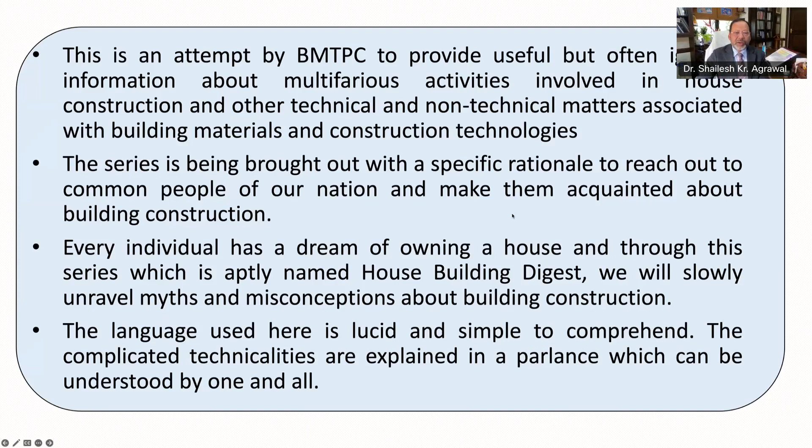Let's discuss plastering. Plastering is an element which gives an appreciative appearance to your house, protects it from vagaries of nature, dampness, etc. Accordingly, the home owner should acquaint himself with the process of plastering and carry it out with utmost care. It involves covering of rough surfaces of superstructure walls or underside of ceilings so as to obtain an even, smooth and durable surface.

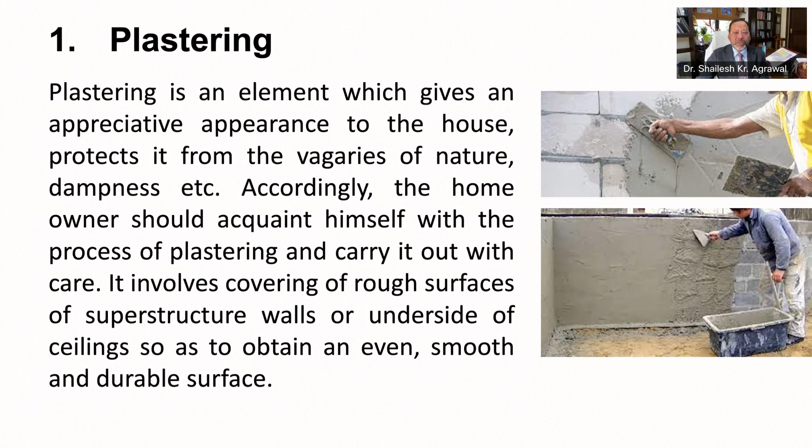Plastering protects the wall against wind, rain, abrasion, and improves the thermal performance and appearance. Plasters should be easy to apply without the use of expensive and elaborate tools. All types of plasters, especially those on external surfaces, need to offer erosion resistance, impermeability to moisture, impact resistance, and should be well bonded to the wall.

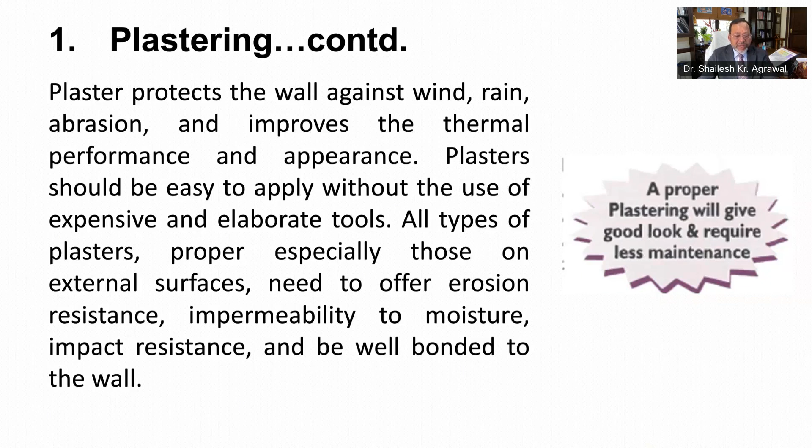Plaster has important requirements in the fresh and hardened states. In the fresh state, plaster must be workable and cohesive. In the hardened state, plaster must be strong enough to hold paint and withstand local impact and abrasion, free of unsightly cracking, well bonded to the base on which it is being applied, should have an acceptable surface texture, and should have acceptable surface accuracy with reference to plane or curved surface.

There are a number of ways in which plastering can be done in a house. The choice of the type of plastering to be provided is dependent upon the architectural features of the house, local availability of the material, and also the budget of the owner.

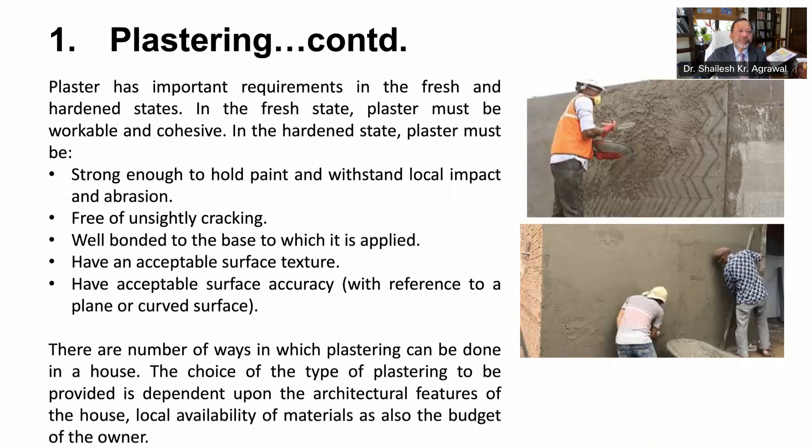Thickness of plaster applied is dependent upon the side of the wall being plastered. The plaster thickness on the rough side of the wall is kept more than that on the smoother side of the wall. When a mason raises a 9-inch thick or 23 centimeter wall or one brick wall, then the side of the wall on which he works gets a smoother surface, and hence it is called smoother side. Since his hand cannot reach the other side of the wall, a rough surface is obtained, and that side is designated as rough side.

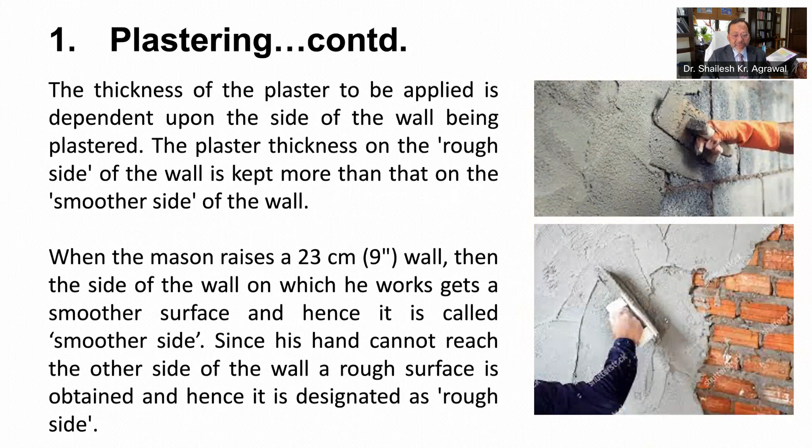Pointing is yet another way of providing protection to the wall, and the process involves application of mortar on the joints of the bricks or stone or block work. There are a number of ways in which pointing can be done on the walls. Usually, pointing works out to be more economical than plastering, and accordingly, it is adopted as a cost-saving measure. In case of pointing, the bricks or blocks remain exposed to the rain, etc., and accordingly, the performance of the walls is not as good as that of a plastered surface.

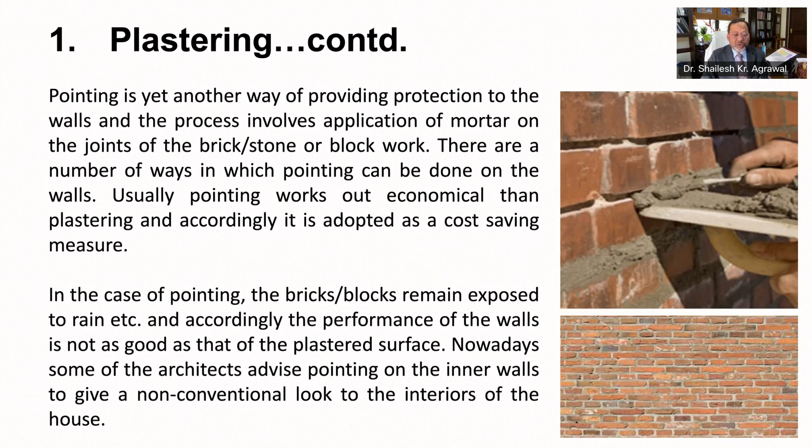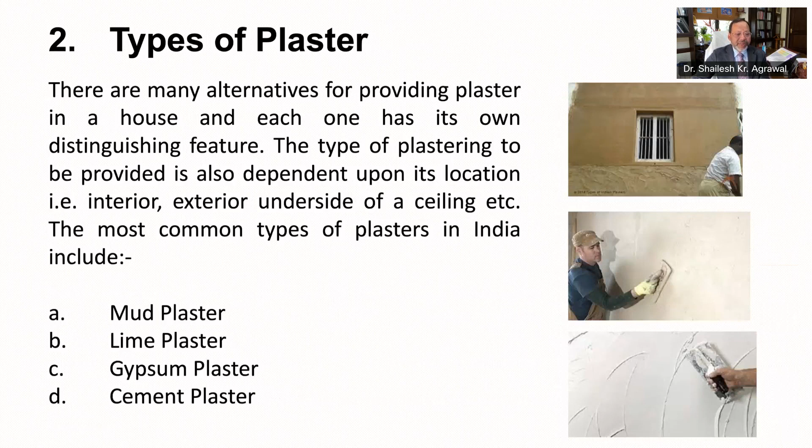Nowadays, some of the architects advise pointing of inner walls too to give a non-conventional look to the interior of the house. There are many alternatives for providing plaster in a house, and each one has its own distinguishing features. The type of plastering to be provided is also dependent upon its location, whether it is exterior or interior or underside of a ceiling. The most common types of plasters in India include mud plaster, lime plaster, gypsum plaster, and cement plaster. Let's discuss them one by one.

Mud plaster. Provision of mud plaster is an age-old method for protecting the walls, and the practice is found in almost all parts of the world. Mud plasters can practically be used for any surface, including mud or burnt bricks, stones, etc. Plasters out of mud are usually adopted in village houses as they are made out of local material, employing local masons and local artisans, and have also proved to be economical. Thermally, mud plasters are more comfortable than other types of plasters.

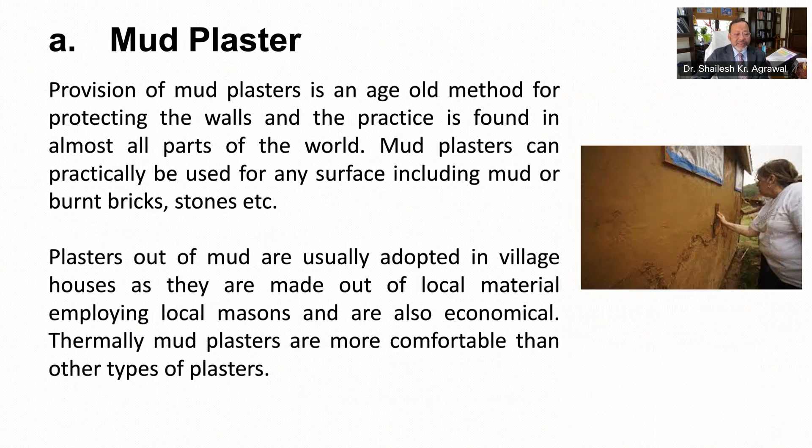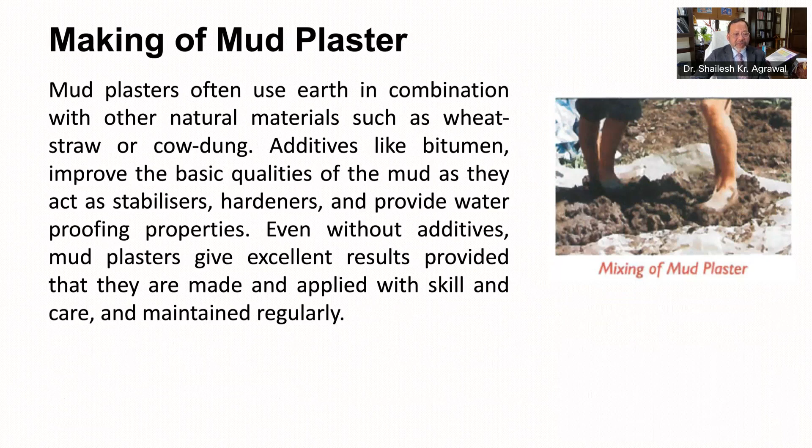Let's understand how to make mud plaster. Mud plasters often use earth in combination with other natural materials such as wheat straw or cow dung or bhusa. Additives like bitumen improve the basic qualities of the mud as they act as stabilizers, hardeners, and provide waterproofing properties. Even without additives, mud plasters give excellent results provided that they are made and applied with skill and great care and maintained regularly. Let me just tell you the composition of mud plaster.

It varies from place to place and is an important factor in determining its durability. If the clay content is too low, the plaster will lack strength and cohesion, and if it is too high, there will be risk of cracking due to mud plaster shrinkage. A suitable clay content is usually around 10 to 15%, but values outside this range could also be suitable depending upon the type of clay you are using. The sand to silt ratio is also very important in determining the quality of plaster. The amount of fibers required will also vary depending upon the soil characteristics, and requirements can vary from place to place.

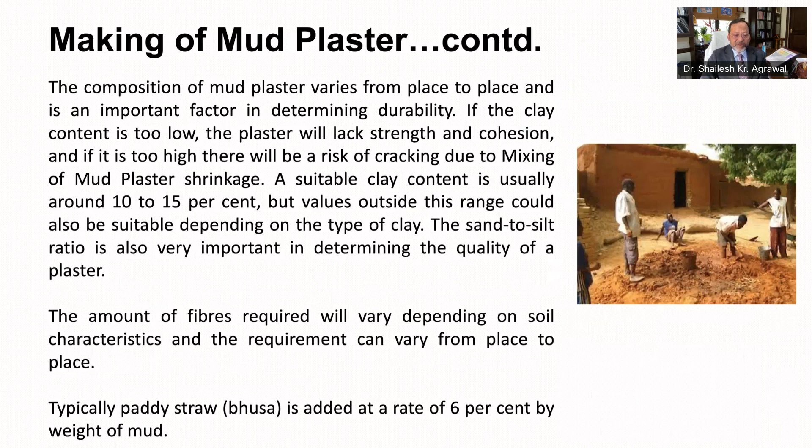Typically, paddy straw, which is also known as bhusa, is added at a rate of 6% by weight of mud. Mud plaster can be applied in two coats. The first coat may be thicker, containing more clay, while the second coat, which may be thinner, may contain more sand. The second coat is usually applied in a thinner layer.

The second coat helps to close the micro cracks in the first layer, provided the surface has been lightly dampened before plastering. Finally, whitewash can be applied to give some additional weatherproofing. If a cement or lime stabilizer is mixed in the mud, the plaster surface should be sprayed with water at least 2 or 3 times a day during the initial period to reduce the development of cracks.

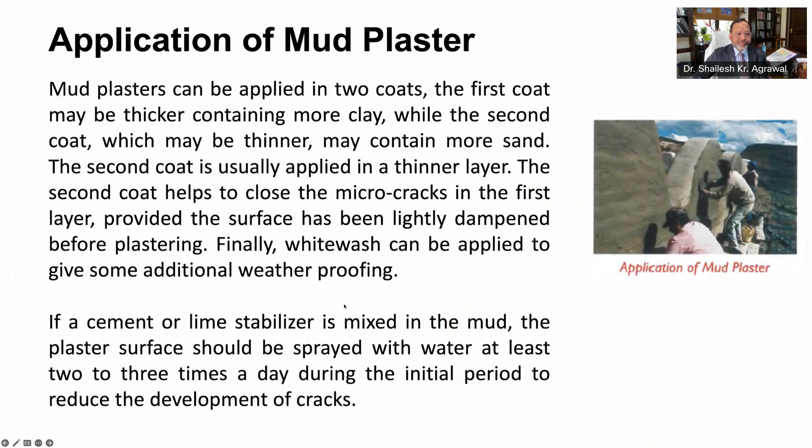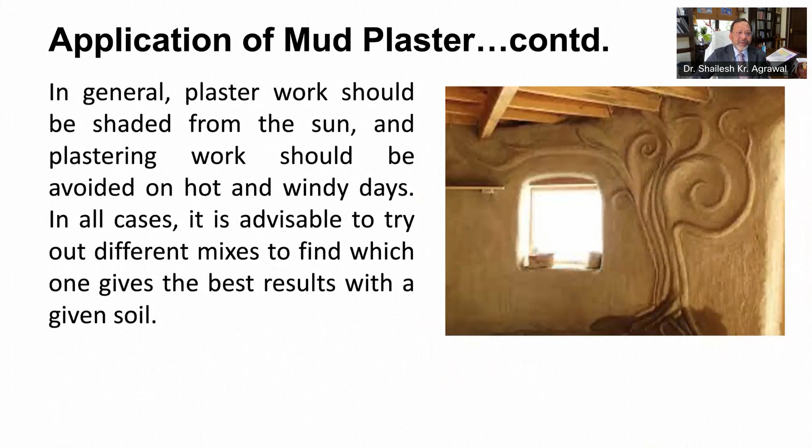In general, plaster work should be shaded from the sun, and plastering work should be avoided on hot and windy days. In all cases, it is advisable to try out different mixes to find which one gives the best results with a given soil. There is another type of mud plaster which is known as wattle and daub walls.

Daub is yet another form of wall finish which is made from mud, animal dung, and straw. It is applied to a structure of wattle or slim interwoven lengths of wood, as shown in this picture on your right hand side.

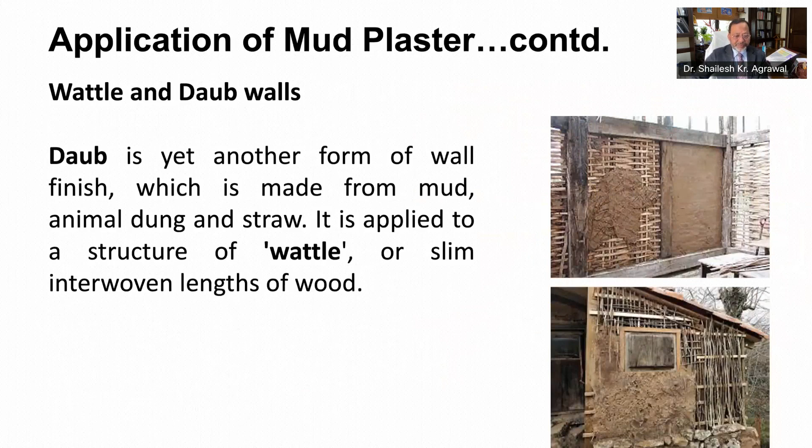Let's move to lime plaster. Lime plaster, as you can see here, plastering of wall surfaces with lime as a binder has been in vogue historically since ages. The lime to be used can either be fat or it can be hydraulic. Fat lime is said to make a good plaster as it makes good putty after slaking.

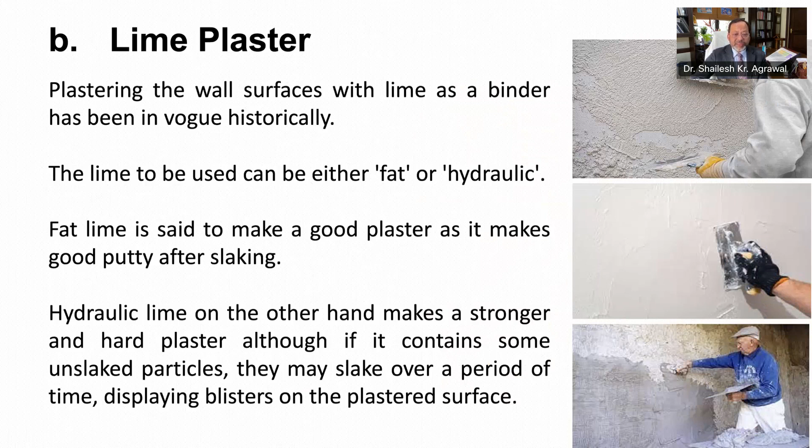On the other hand, hydraulic lime makes a strong and hard plaster, although if it contains some unslaked particles. They may slake over a period of time, displaying blisters on the plastered surface. Let me tell you the advantages of lime plasters. It has light reflecting qualities, creating unique aesthetics.

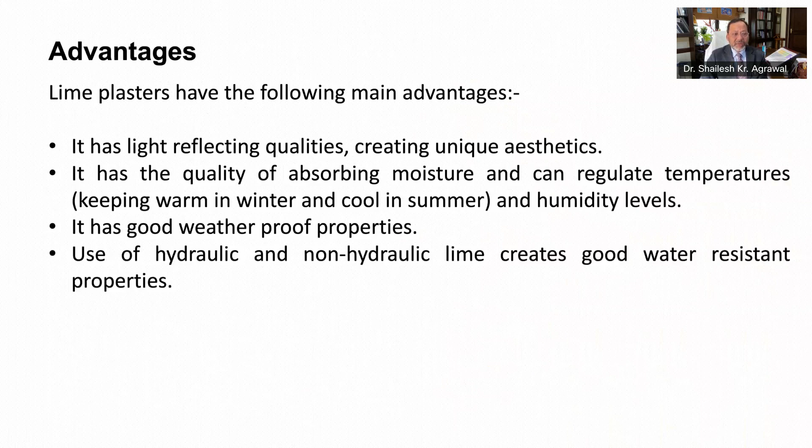It has the quality of absorbing moisture and can regulate temperatures, keeping warm in winter and cool in summer, and balance humidity levels. It has good weatherproof properties. Use of hydraulic and non-hydraulic lime creates good water resistant properties. The constituents of lime plasters are as given here: lime and fine aggregates. Let's discuss them one by one.

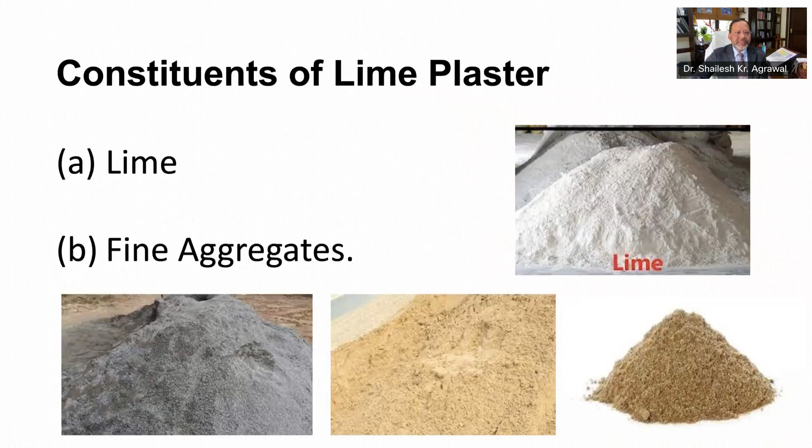Normally, two types of lime are available in the market. One is quick lime and another one is hydraulic lime. Quick lime, also known as non-hydraulic lime, is supplied in the form of lumps and is slaked by addition of water and converted into lime putty before use. Slaking is done in large tanks where water is added to convert the quick lime to hydrated lime.

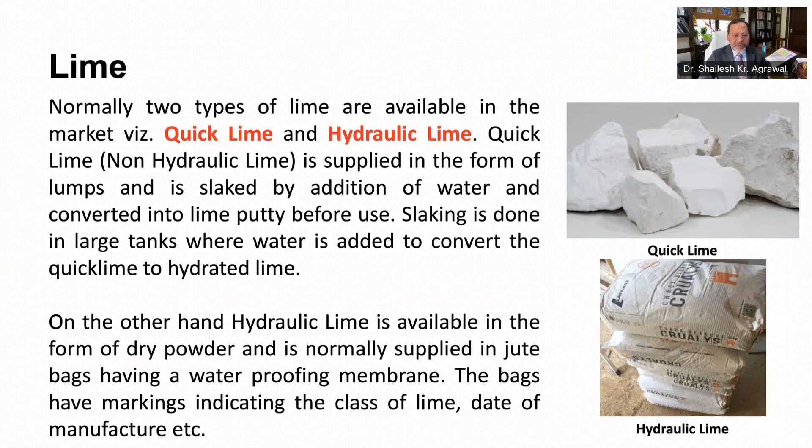On the other hand, hydraulic lime is available in the form of dry powder and is normally supplied in jute bags having a waterproofing membrane. The bags have markings indicating the class of lime, date of manufacture, etc. Due to delays involved in slaking process of quick lime, hydrated lime is mostly used in construction. Normally, hydrated lime is converted into lime putty by soaking it for at least 16 hours.

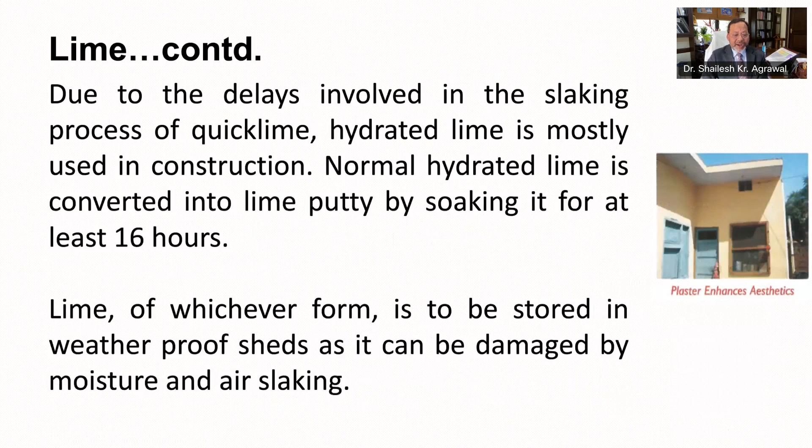Lime of whichever form is to be used, it has to be stored in weatherproof sheds as it can be damaged by moisture and air slaking. Now let's discuss fine aggregates. For the purpose of preparation of mortar for lime plaster, fine aggregates are to be added to lime. The fine aggregates can be in the form of natural sand, crushed stone sand, stone dust, marble dust, fly ash, or surkhi. The aggregates should be hard, durable, chemically inert, and free from organic impurities.

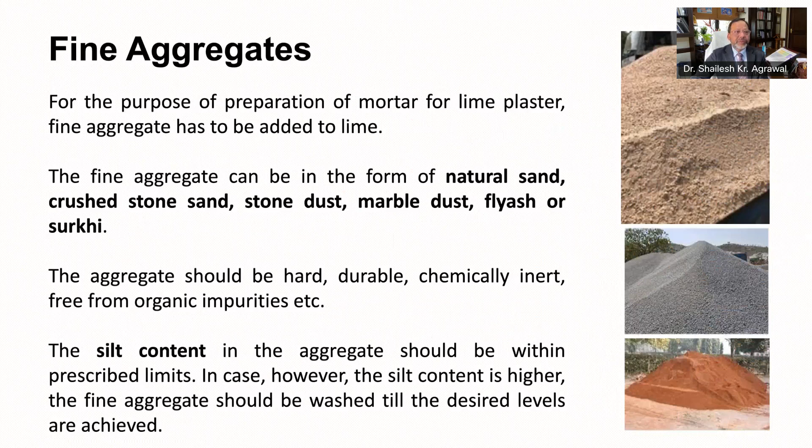The silt content, always remember, in the fine aggregate should be within prescribed limits. In case the silt content is higher, the fine aggregate should be washed properly till the desired levels are achieved. The proportions of various materials to be used for making lime mortar depend upon the properties of lime and the requirements of strength. Lime mortars for plastering can be made adding the aggregates in various proportions depending upon the requirement and local availability of materials.

Typical proportions by volume, which are commonly used: 1:1:6, where 1 is cement, 1 is lime, and 6 is sand. 1:2:9, where 1 is cement, 2 is hydraulic lime, and 9 is sand. 1:1:2, where 1 is lime, 1 is pozzolana, and 2 parts of sand. 1:2:8, when surkhi is to be used: 1 is cement, 2 is lime, and 8 is surkhi.

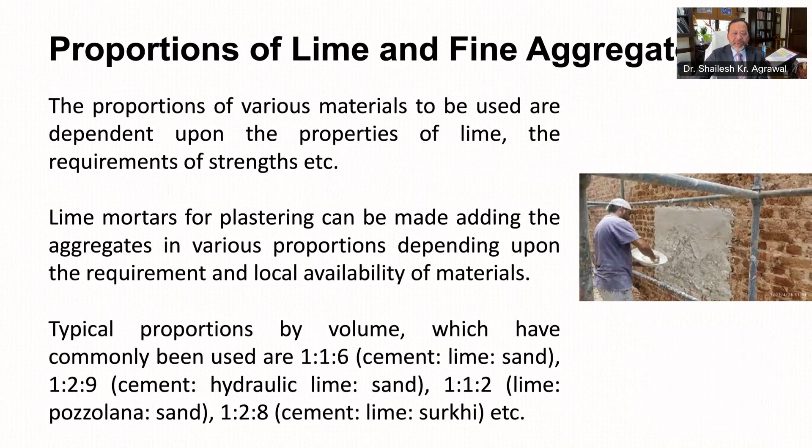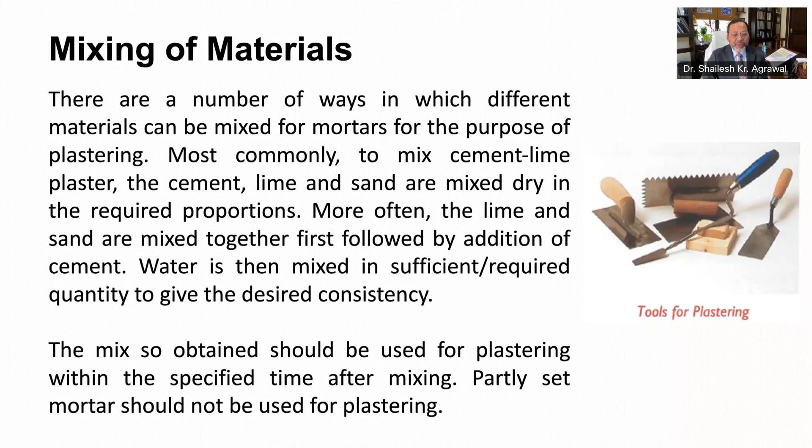There are a number of ways in which different materials can be mixed for mortars for the purpose of plastering. Most commonly, to mix cement lime plaster, the cement, lime, and sand are mixed dry in the required proportions. More often, the lime and sand are mixed together first, followed by addition of cement. Then, water is mixed in sufficient or required quantity to give it desired consistency. The mix so obtained should be used for plastering within the specified time after mixing. Partly set mortar should not be used for plastering.

The thickness of lime plaster may be 12 mm, 15 mm, or 18 mm. The 12 mm thickness is applied on the smooth side of the wall. Remember, I explained to you what is the smooth side and rough side of the wall, whereas 15 mm thickness is applied on the rough side. The 18 mm plaster is applied always in two coats, the first being 12 mm thick and the second coat being 6 mm thick.

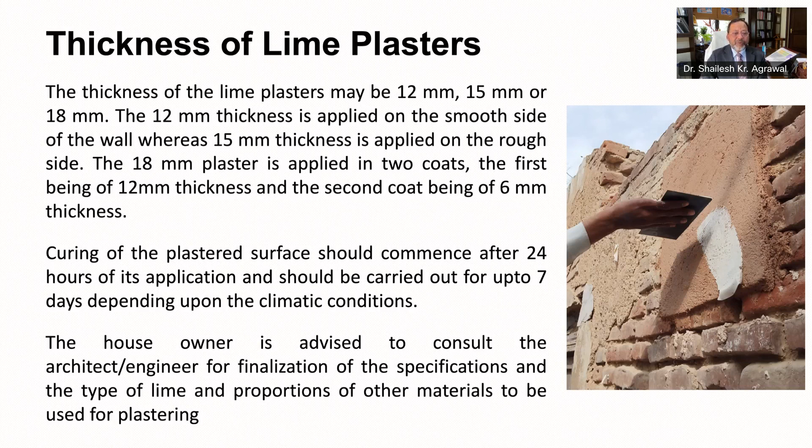Curing of the plastered surface should commence after 24 hours of its application and should be carried out up to 7 days depending upon the climatic conditions. The house owners are advised to consult the architect and engineer for finalization of the specification and type of lime and proportions of other materials to be used in plastering.

Let's move to the next kind of plaster, that is plaster of Paris, also known as gypsum plaster. Research has shown that gypsum in conjunction with lime has been in use since the 16th century for flooring, walling and ceiling, although gypsum was mixed in small quantities only. Over the last 200 years, gypsum has been predominantly used for casting decorative elements.

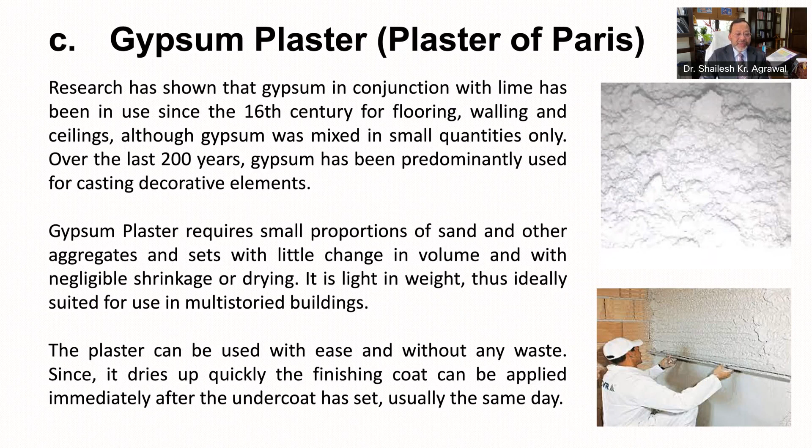Gypsum plaster requires small proportions of sand and other aggregates and sets with little change in volume and with negligible shrinkage on drying. It is light in weight, thus ideally suited for use in multi-storied buildings. The plaster can be used with ease and without any waste. Since it dries up quickly, the finishing coat can be applied immediately after the undercoat has set, usually the same day.

Gypsum plaster should not be used in humid areas or for external work, as it has an inherent affinity for absorbing dampness or moisture. Further, bags containing gypsum plaster should not be kept in humid surroundings for longer periods, as it absorbs moisture from the atmosphere. Prolonged storage hastens the rate of setting, leading to reduction of strength of set plaster. Storage for 3 months of gypsum plaster, even in a dry place, results in its deterioration.

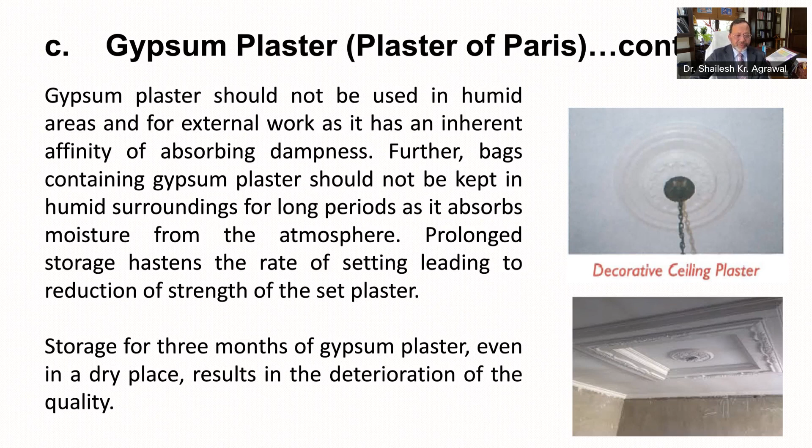Now let's move to the most common plaster being used, which is cement plaster or Portland cement plaster, also known as stucco. It is an excellent plaster for all locations. It is strong and durable and can be finished in a wide range of colors and textures. Cement can be mixed with fine or coarse sand, although other materials like lime and fly ash can also be added in different proportions to get the mortar for plaster. The water to cement ratio is very critical for such type of plasters.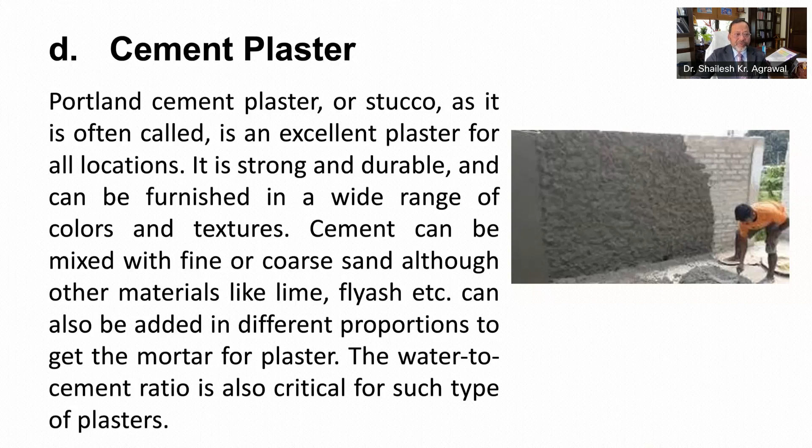The main materials for preparation of cement mortar for plaster works are cement and aggregates. Let's discuss them one by one. Normally, 43 grade cement is used for construction of buildings and houses. The cement is usually supplied in bags of approved quality, which should have the name of manufacturer, date of manufacture, grade and type of cement. Cement brought to the site should not be more than 6 weeks old from the date of manufacture.

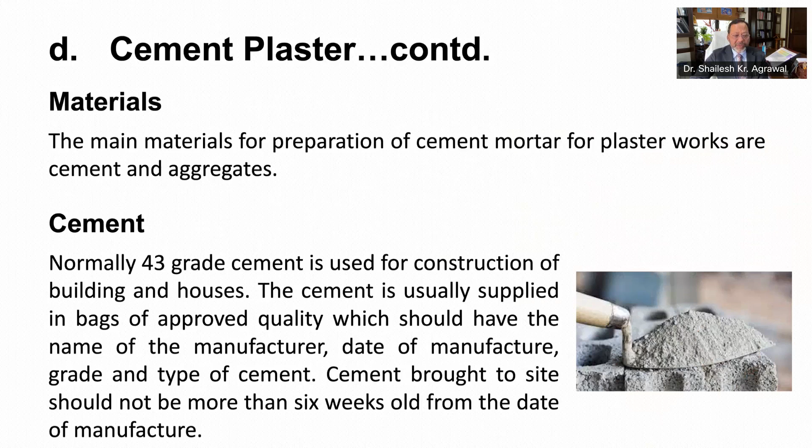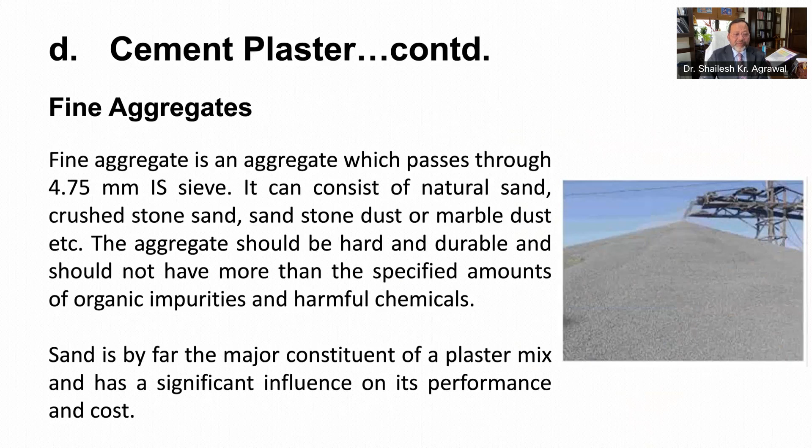Fine aggregate is an aggregate which passes through a 4.75 mm IS sieve. It can consist of natural sand or crushed stone or sandstone dust or marble dust. The aggregate should be hard and durable and should not have more than the specified amount of organic impurities or silt or harmful chemicals. Sand is by far the major constituent of a plaster mix and has a significant influence on its performance and cost.

In a plaster, water performs two functions. Water is very important. First, it transforms the dry ingredients into a plastic workable mix. Second, it combines with the binder to induce hardening. A fixed quantity of water per unit of cement is required for complete hydration, and the water cement ratio as desired should be maintained in the mortar mix. Excess over this amount will reduce the plaster strength.

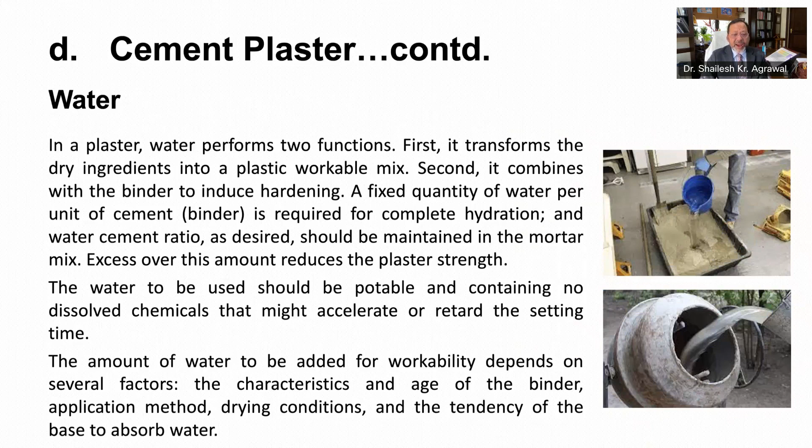The water to be used should be potable, that means drinking water, and should contain no dissolved chemicals that might accelerate or retard the setting time. The amount of water to be added for workability depends on several factors such as characteristics and age of the binder, application method, drying condition, and the tendency of the base to absorb water.

Let's look at the mix proportions of cement plaster mortar. Cement and sand mortars for plastering can be in the ratio of 1:3, 1:4, or 1:6 by volume, the ratio representing cement to sand. The sand to be used, as I explained to you earlier, can either be fine or coarse depending upon the construction specifications prepared by the architect and engineer.

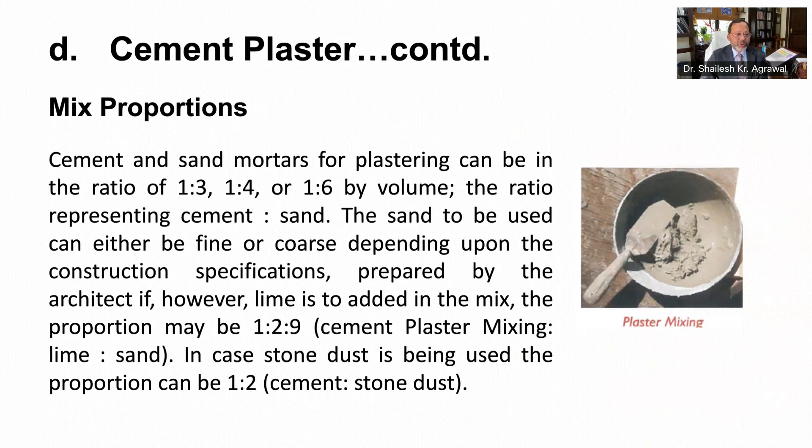However, if lime is to be added in the mix, the proportion may be 1:2:9, where 1 is cement, 2 is lime, and 9 is sand. In case stone dust is being used, the proportion can be 1:2, where 1 is cement and 2 is stone dust. Cement plaster can be mixed either by hand or by using a machine.

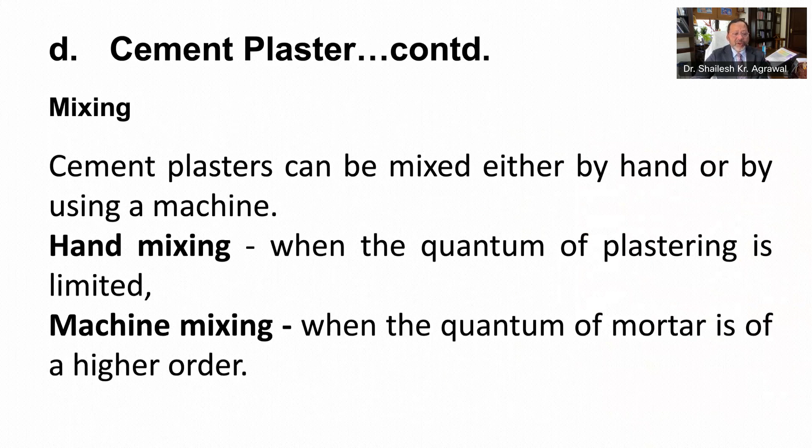Hand mixing is usually done when the quantum of plastering is limited, say in case of a house, whereas machine mixing is used when the quantum of mortar is higher. In hand mixing, the dry ingredients, that is cement and aggregates, are thoroughly blended in the dry state in required quantities, preferably on a plain GI or other such sheet or board.

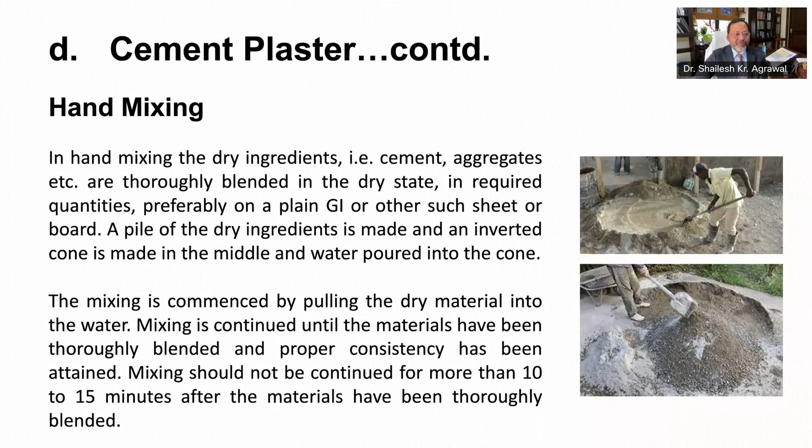A pile of dry ingredients is made and an inverted cone is made in the middle as shown in this picture, and water is poured into the cone. The mixing is commenced by pulling the dry material into the water. Mixing is continued until the materials have been thoroughly blended and proper consistency has been attained. Mixing should not be continued for more than 10 to 15 minutes after the materials have been thoroughly blended.

For a quicker, more thorough mix, a plaster mixing machine is used. In this case, the water is added in the first instance, followed by adding half quantity of sand, cement, and any admixture desired is then added, followed by the remaining quantity of sand. Mixing takes place either by rotation of the drum or by rotation of the blades inside the drum. The drum is tilted to discharge plaster into a wheelbarrow or other container.

The batch is mixed until it is uniform and attains a proper consistency. Usually 3 to 4 minutes of mixing is sufficient for achieving the desired results. In either case, whether it is hand mixing or machine mixing, the plaster must be used within 2 hours of mixing, and no set plaster should be remixed with water and used.

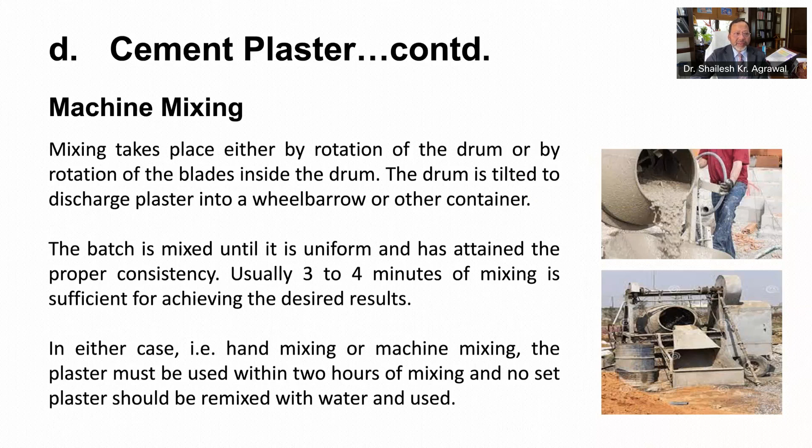The building surfaces to be plastered must be clean. They should be free from paint, oil, dust, etc., if any, before commencement of plastering. It is always advisable that on brick and block building walls, they are to be raked out from the joints by about half an inch to provide a mechanical key. Joints should be raked while the mortar is still soft.

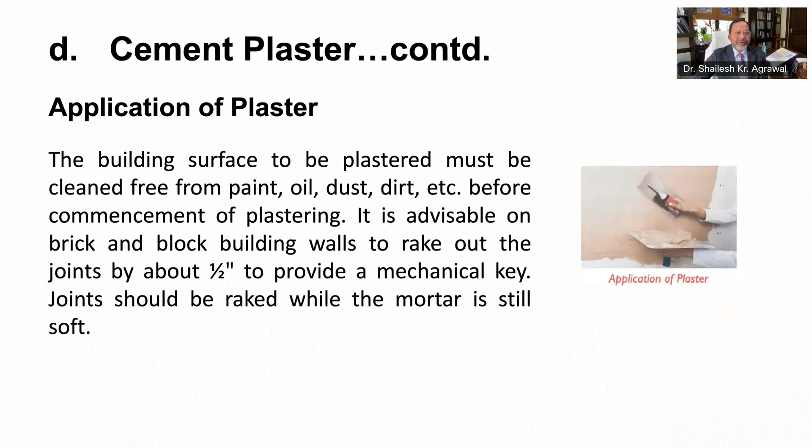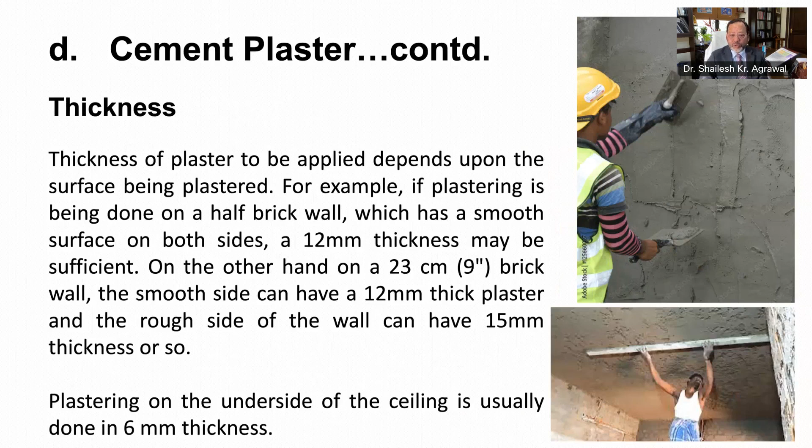Thickness of plaster to be applied depends upon the surface being plastered. For example, if plaster is being done on a half brick wall which has a smooth surface on both sides, a 12 mm thickness may be sufficient. On the other hand, on a 23 centimeter or 9-inch brick wall, the smooth side can have 12 mm thick plaster, and the rough side can have 15 mm thickness or so. Plastering on the underside of ceiling is usually done in 6 mm thickness.

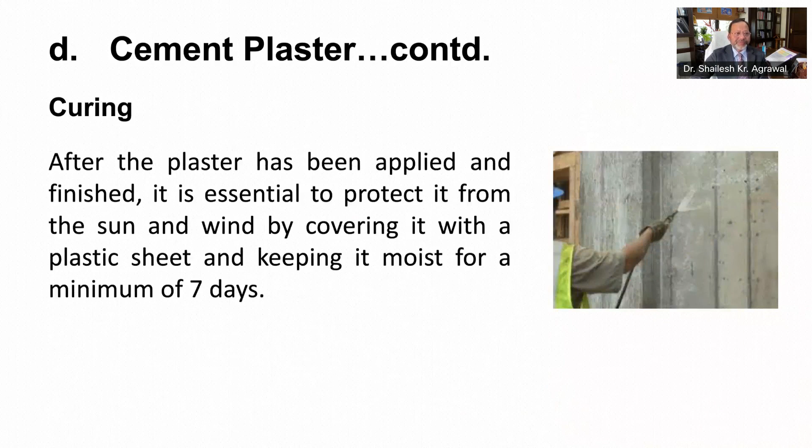After the plaster has been applied and finished, it is essential to protect it from the sun and wind by covering it with a plastic sheet and keeping it moist for at least 7 days. In order to have good plastering practice, the following procedure will help. Number one, the constituents of plaster, say cement, lime, sand, etc., should be available in adequate quantity to finish the day's job. It may be remembered that lime needs soaking, clay needs to be screened, and straw needs to be shredded, and the like.

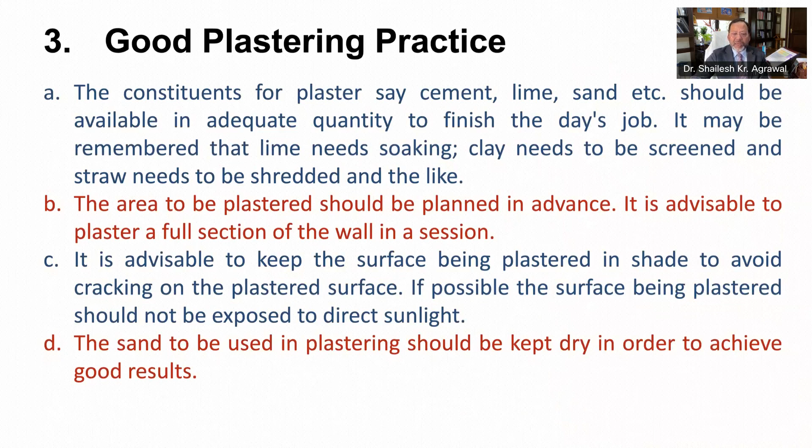The area to be plastered should be planned in advance. It is advisable to plaster a full section of the wall in a session. It is also advisable to keep the surface being plastered in shade to avoid cracking on the plastered surface. If possible, the surface being plastered should not be exposed to direct sunlight. The sand to be used in plastering should be kept dry in order to achieve good results. The tools for plastering should be absolutely clean before commencement of plastering work.

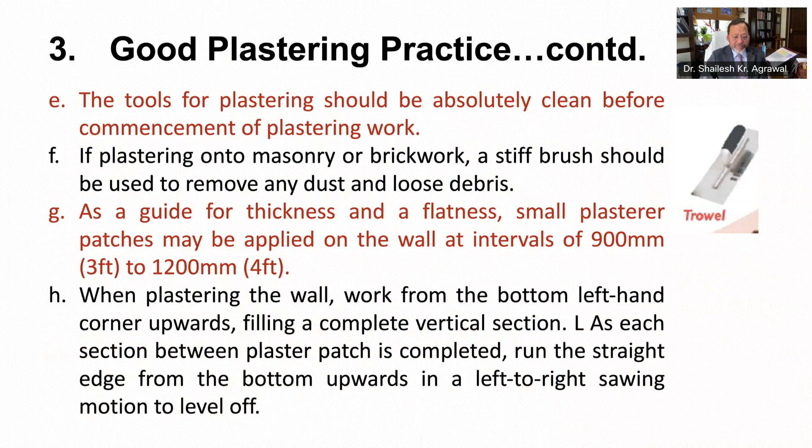If plastering onto masonry or brickwork, a stiff brush should be used to remove any dust or loose debris. As a guide for thickness and flatness, small plaster patches may be applied on the wall at intervals of 3 feet to 4 feet. While plastering the wall, work from the bottom left-hand corner upwards, filling a complete vertical section. As each section between plaster patches is completed, run the straight edge from bottom upwards in a left to right sawing motion to level it off.

After about 20 minutes, run a clean float over the wall to remove any marks and flatten it to a smooth finish. On the final layer of plaster, that is after flattening and a further 30 to 40 minutes, splash the wall with a little clean water using the brush and then run a clean float over it. The water acts as a lubricant to allow the trowel to run over the surface, picking up any loose particles and depositing them in any tiny holes. This produces a silky, smooth finish.

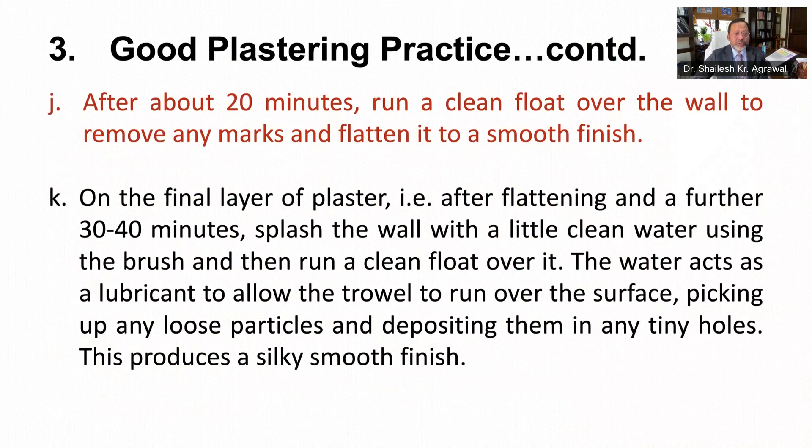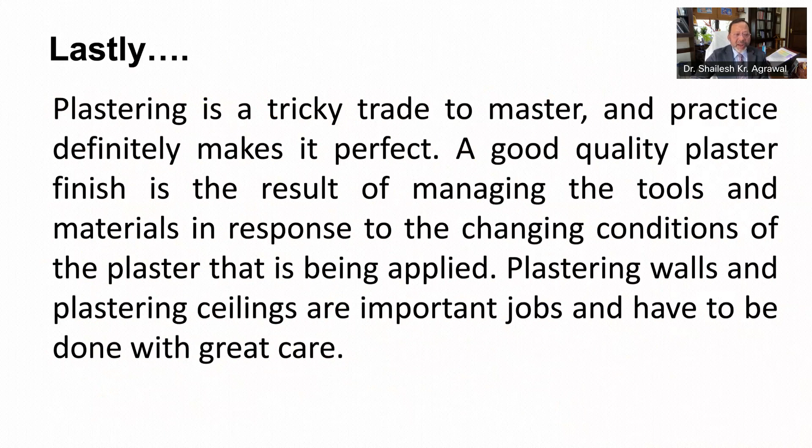At last, plastering is a tricky trade to master and needs to be practiced to make it perfect. A good quality plaster finish is the result of managing the tools and materials in response to the changing condition of plaster that is being applied. Plastering walls and plastering ceilings are important jobs and have to be done with great care. Most professionals recommend that each layer of plastering be done in two applications to achieve good results. The second layer of plaster has to be applied when the first has got stiff but not dry.

Experienced plasterers are of the opinion that it costs 3 times as much to replaster a terrible surface as it does to get it right the first time. So always do the plaster with great care.